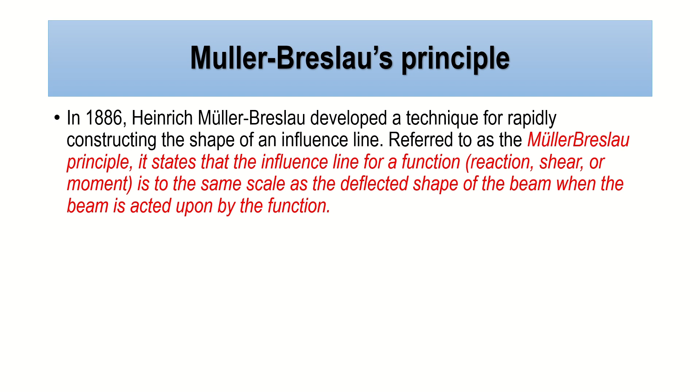So it's very simple. Let's start with the vertical reaction. How do we create the shortcut method for the vertical reaction influence line? For example, we have a given beam, and we are solving for the vertical reaction at point A. How do we get the shape of the influence line for the vertical reaction at point A?

The support is to be replaced by a roller guide. So you replace it with a roller, and then when the positive upward force is applied at AY, the beam deflects to the dashed position, which represents the general shape of the influence line. We replace it with a roller guide, then apply the vertical upward reaction AY, and the beam moves to the dashed position.

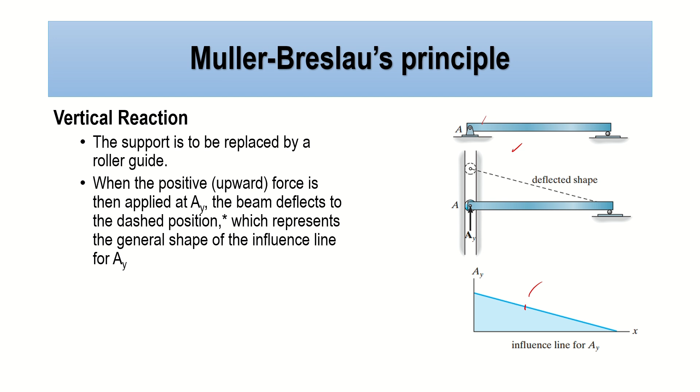So whatever the deflected shape is, that is also the shape of your influence line. The modification we used here is replacing the support condition with a roller guide, then applying an upward vertical force. So for practice, let's try to solve problem number 7.

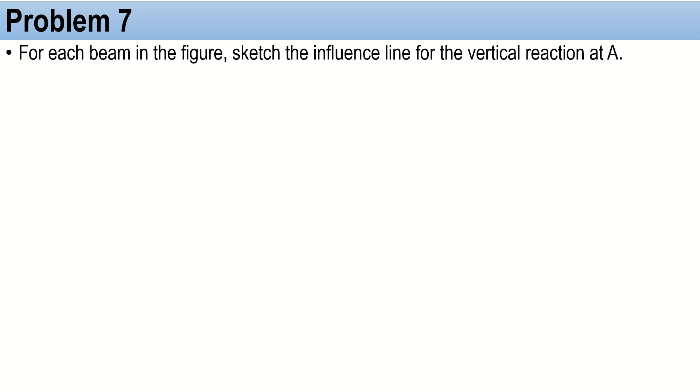For each beam in the figure, sketch the influence line for the vertical reaction at point A. We have the first figure here. Again, we replace this with a roller guide. Once replaced, we apply an upward vertical reaction. Remember, it shouldn't move here because it's on a roller, so it's supported vertically and shouldn't move. If we move this, having replaced it with a roller guide and applied an upward force, this will be the deflected shape of the beam, and that deflected shape is also the shape of your influence line.

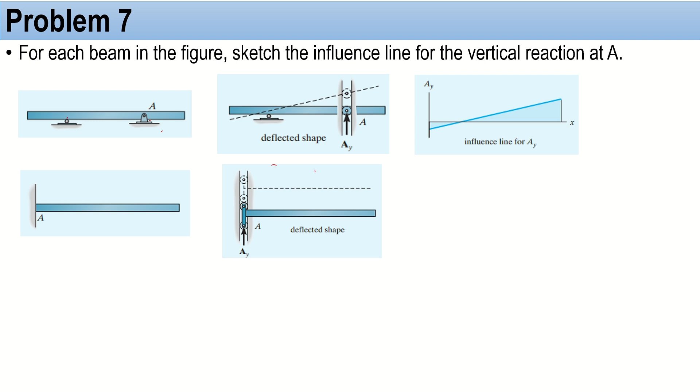For more practice, let's try another one. For example, we have a cantilever beam. Again, the support condition will be replaced by a roller guide. Once we replace it with a roller guide, it will freely move upward. Then we apply an upward vertical reaction, so this will be the shape of your influence line. As you can see, the fixed support is gone, replaced by a roller, we apply upward force, and that becomes your deflected shape, which is also the influence line.

How about this one? First thing you need to do is determine if it is statically determinate. How many unknowns do we have? We have 2 rollers, so 2 unknowns, plus another pin, so another 2. Then there's one internal hinge, which adds another 2 unknowns.

So how many total? 2 plus 2 is 4, plus another 2, that's 6. If you notice, our formula is 3n. How many rigid segments do we have? That's 2, since it's divided by the internal hinge. So 6 versus 2 times 3, which equals 6. So figure number 3 is definitely statically determinate.

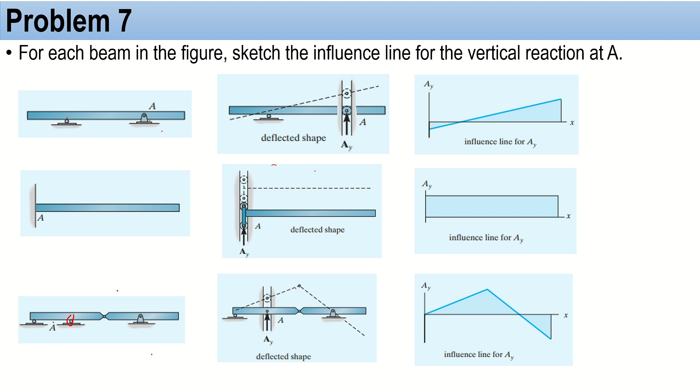Ngayon, inangat natin, so aangat yan, sasabay yan. Ito, nakatali tayo dyan kasi may support. So whatever the deflected shape of this one is, that is also the shape of your influence line. Hopefully na-understand. Kapag hindi naman na-understand, pwedeng balik-balikan, i-post tapos imaginein kung ano yung deflected shape ng beam, and then try to draw the influence line. So let's move on.

So what if we're getting the influence line or the shape of the influence line with regards to shear? Actually, ganun din. The shear location is to be replaced by a roller guide, ibig sabihin papalitan din natin siya ng roller guide. This device will resist a moment and axial force but no shear. Apply a positive shear force to the beam at C and allowing the beam to deflect to the dash position, we find the influence line shape.

So again, ito ang ating figure, yung nasa kanan nyo. We have here, we need to replace the point where we want to get the shear by a roller guide. So ni-replace na natin siya, kailangan natin mag-apply ng positive shear.

Remember, dun sa una kong principle na binigay sa inyo, ang sabi ko, kapag nag-apply tayo ng shear or kapag nag-cut tayo, yung positive shear natin, if we're considering the left side of the beam is downward, kapag we're considering the right side of the beam, that is upward. So if we apply that positive shear in our roller guide, this will be the deflected shape of your beam. Remember, nakatali tayo, may support tayo dito. Hindi yan dapat gumalaw. Again, whatever the deflected shape of the beam is, this is also the shape of your influence line. So let's try some exercise.

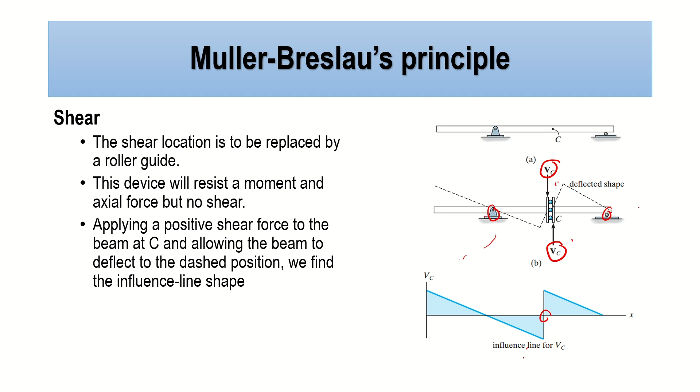Let's figure out or let's solve this problem number 8: for each beam in the figure, sketch the influence line for the shear at B. So we have here the first figure. Again, you will replace that by a roller guide.

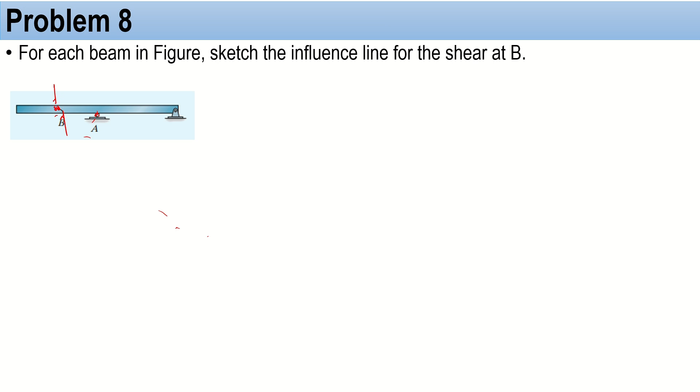Once we replace that by a roller guide, apply positive shear: downward sa left side, upward sa right side. Since nakatali ito, hindi yan mag-move. So the deflected shape of this one will be like this. Hindi siya nag-move kasi may tali ka dito, hindi yan pwede gumalaw. O hindi ka naman pwedeng maggalaw na biglaton kasi sasabay ito. So ibig sabihin, yung left side mo lang yung gagalaw na pababa. So this will be your influence line. I hope you understand.

So let's try to solve another problem. Ngayon, again, replace this by a roller guide, apply downward to the left, upward to the right. Sa left side, hindi rin po yan gagalaw. Why? Kasi naka-fix ka dito. Compare kapag nakapin ka lang. Remember, kapag fixed support, it does resist moment and reaction. So hindi yan mag-move. Ano lang yung mag-move? Yung right side. So kapag nag-move yung right side, syempre, in-applyan mo yan ng upward force. So this will be the deflected shape of your beam. This will also be the shape of your influence line.

Hopefully you do understand. So let's have another one. Again, this is a statically determinate beam. Kayo na lang mag-figure out. Again, we will replace this by a roller guide, then apply downward and upward: downward sa left side, upward sa right side.

Ngayon, eto may restriction ka, tapos meron kang dito, meron kang internal hinge. So malamang, aangat yan kasi ito doesn't provide any resistance. And then after this, bababa ito. And then, iaangat ka ngayon ng iyong right side ng segment ng beam. So this will be the deflected shape. As you can see here, that is also the shape of your influence line. Again, if you're having a hard time to imagine, you can pause this video and try it yourself. Pwede naman na kukuha lang yan sa paulit-ulit.

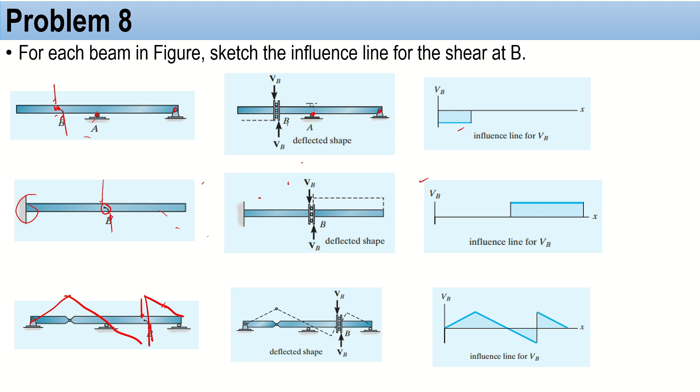That's how we figure out the shape of the influence line with regards to the shear, no? So, how about the moment? The moment location is to be replaced by a hinge or a pin. This connection can resist axial and shear forces but cannot resist a moment, no?

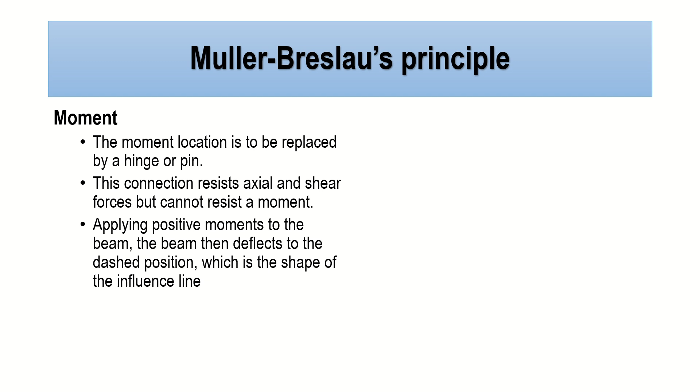Applying positive moment to the beam then deflects to the dashed position, which is also the shape of the influence line. Instead of roller guide, just like what we did in the previous concept, we will replace it with a pin or hinge. Kapag ni-replace natin siya ng hinge, apply positive yung moment. Remember, kapag left side, counterclockwise. Kapag right side, clockwise.

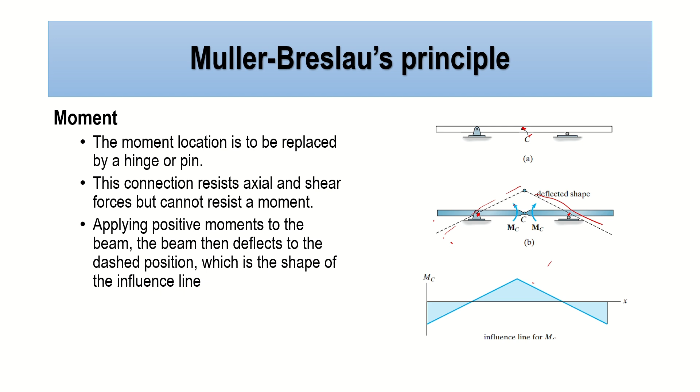Once you applied it, whatever the deflected shape is, that is also the shape of your influence line. Remember, meron kang restriction dito, hindi dapat yan gumalaw. Ito, free end naman yan, so ibig sabihin, yan yung deflected shape mo. That is also the shape of your influence line. Hopefully you do understand, no? Okay, let's try to solve some problems.

For each beam in the figure, sketch the influence line for the moment at B. So anong gagawin natin? First, this is our beam. Replace this by internal hinge and then apply, for the left side counterclockwise moment, for the right side clockwise moment. Remember, whatever you apply, kahit anong movement dito sa left side, hindi yan mag-move, kasi meron kang pin dito, tsaka meron kang roller.

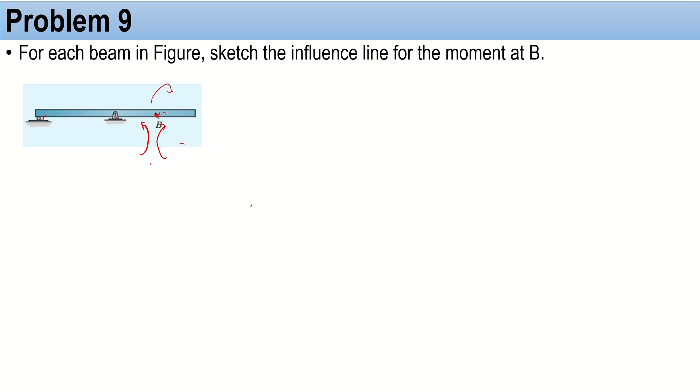Meron kang mga restriction, so ano lang yung mag-move? Yung right side. Kapag in-applyan mo yan ng moment na pag ganun, ganito yung deflected shape niyan. So ngayon, as you can see, ganyan yung nangyari. That is also the shape of your influence line. Okay, let's try another problem.

Again, meron ka dito sa gitna. Applyan mo ng left side counterclockwise, right side clockwise. Remember, this is a fixed support that can resist any moment, so therefore this will not move. Yung mag-move lang is yung right side, which magiging ganun lang, just like what happened in the first figure. So ibig sabihin, yan din yung shape ng influence line.

Okay, ngayon we have another beam right here. Again, papalitan mo to ng hinge. A-applyan mo ngayon ng positive moments. Remember, this is an internal hinge, so ibig sabihin sasabay yan sa pag-move, dahil in-applyan mo to ng counterclockwise movement and hindi sapat yung restriction niya para hindi siya gumalaw.

So ibig sabihin, ito ay aangat. And then once na umangat yan, pag umangat yan, aangat din yung right side dahil naka-hinge ka dito. Hindi siya masyado restrict, no? So itong right side aangat din na hindi gagalaw yung mga nasa support, ha? And then after that, dahil sa paggalaw na ito pababa, ito may restriction ka, aangat ulit. So this will be the deflected shape of your beam.

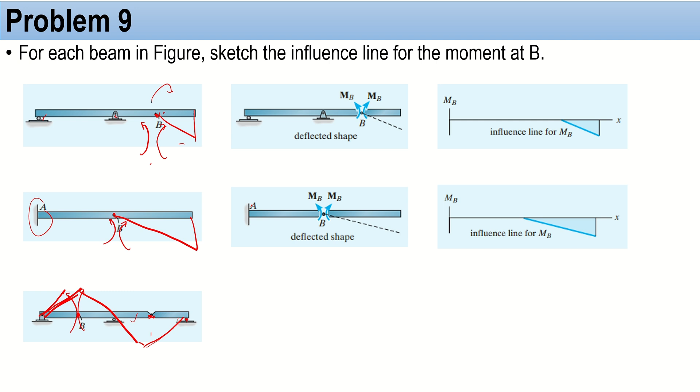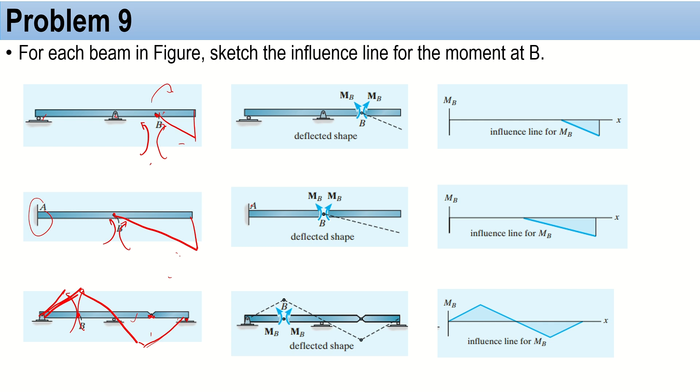That is also the shape of your influence line. Okay? Hopefully you do understand what's happening in my lecture, no? If you do have questions, you can drop that question in our comment. Okay, let's move on.

So alam na natin yung shape ng influence line. But how do we get the ordinate of the influence line using Müller-Breslau's principle? Madali lang, no? For the reaction, the magnitude of the influence line in the reaction is always positive 1. For example, di ba nagganyan yan? Ganyan yung shape ng influence line mo. Kung ganyan yung shape ng influence line mo, yung ordinate daw dito sa reaction is always 1.

Kapag 1 yan, you can do the rest using ratio and proportion or similar triangle, kasi remember, based on the principle that I discussed earlier from the previous video, yung influence line ng statically determinate beams is in straight line segments. Kung meron ka ng isang value dyan, you can also solve for the other ordinates using similar triangle or ratio and proportion.

Okay, so for this one naman, to get the value of the shear, remember, hindi ito mag-move, no? Parang paganyan yan. Dito mag-move. To get the value for the ordinate of the shear, apply 1 unit load dito, and then get the shear left, shear right. Whatever the shear left, that is also the ordinate here, and whatever the shear right, that is also the ordinate in the right side. Mag-apply ka lang ng 1 unit load.

And then do the shear, then find the different ordinate using ratio and proportion. So how about the moment? Same thing applies - apply 1 unit load to the point desired and get the moment at that point. Whatever moment you get there is also the ordinate of your influence line. Same with shear - whatever shear you get, that's the ordinate of the influence line. Whatever moment you get, that's also the ordinate. Don't forget to apply the 1 unit load.

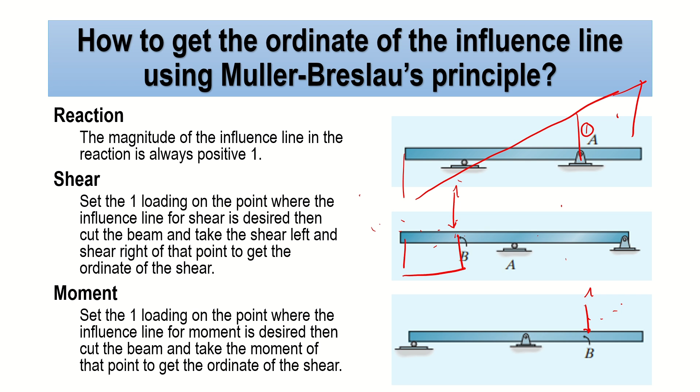So I think we have here influence line for beams. We said concentrated loading. So how do we get the magnitude? Since we already got the ordinate here, how about the magnitude or value - what is the maximum positive in kilonewtons as reaction, or maximum negative in kilonewtons as reaction?

It can be either reaction or shear, in kilonewtons. So for the maximum positive or negative, place the concentrated load where the highest positive or negative ordinate is located. Multiply the concentrated load to the ordinate to get the magnitude. Usually what's asked in questions is: what is the maximum positive reaction, what is the maximum positive shear if one concentrated load is moving. So what you do is, if maximum positive or negative is asked, just place the 1 unit or concentrated load where the maximum positive or negative ordinate is located.

For example, you have a moving 90 kN load. If you want to get the value for the maximum positive reaction that the beam can generate, just place the 90 there. Once placed, multiply the 90 by the ordinate of the influence line. In this figure, the ordinate is 1. Whatever the value is, that's also the magnitude - or how large the reaction value will be when the 90 kN moves along this beam.

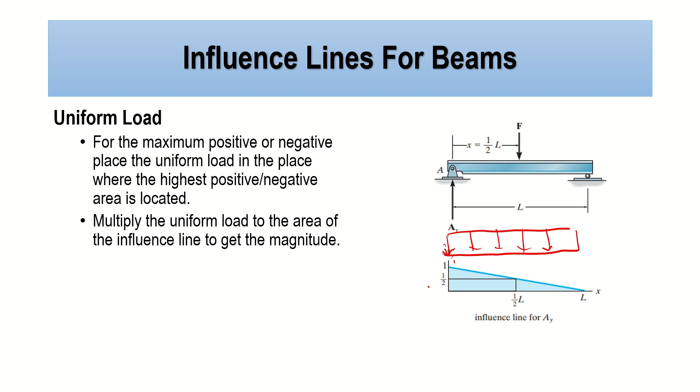Say you have 10 kN per meter here. To get the magnitude, multiply the area where you placed the moving load by the ordinate of the uniform load, and then you will get the value for the magnitude, okay?

So say you're looking for that - what area is that? It's just a triangle, so 1/2, height is 1, base is L. Then multiply that by 10, and that will be your magnitude, whatever is being asked.

Let me repeat to make it clearer. If we have a uniform load that is moving, and you're looking for positive, just place the uniform load on the positive part of the influence line. If you're looking for negative, place the uniform load on the negative part of the influence line. Once placed, to get the magnitude, multiply the area of the influence line where you placed the uniform load by the uniform load value, and you will get the magnitude. If you're still confused, we do have an example. That's how we get the magnitude of the influence line.

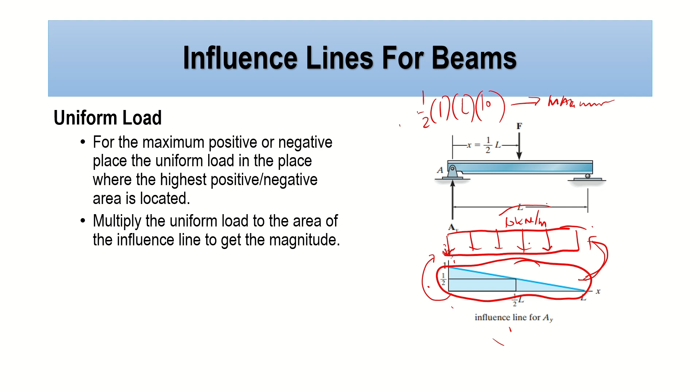Okay, so let's try to solve problem number 10. Determine the value for the maximum positive shear that can be developed at point C in the beam shown in the figure, subjected to a concentrated moving load of 4 kN and a uniform moving load of 2 kN per meter. So, first thing we need to do is redraw the figure.

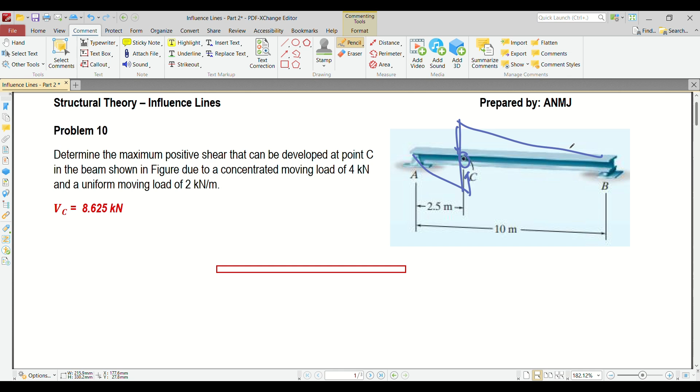Let me redraw the figure. So, that's our figure. And then apply the deflected shape of the beam. Again, when shear is being asked, you will apply a roller guide. Then apply downward shear for the left beam, upward shear for the right beam. So what happens there is it goes down, then rises, then goes down again. So that will be your influence line.

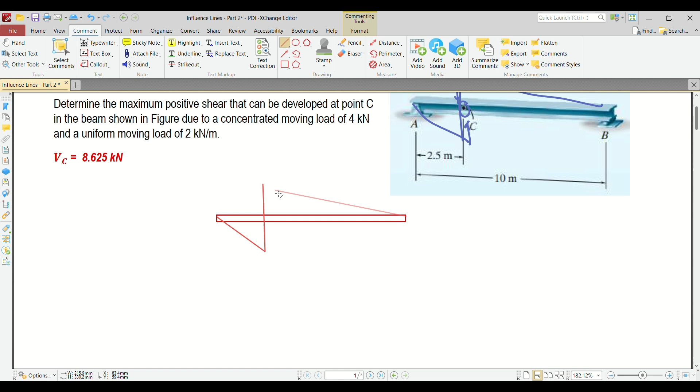Okay, so I already drew the influence line. Now we need to find its magnitude, or the ordinate. How do we find the ordinate? Remember, as I said earlier, you need to place a 1 unit load. So place the 1 unit load here, then get the shear left and shear right to get the value for the ordinate. If you have a 1 unit load there, you need to get the reaction.

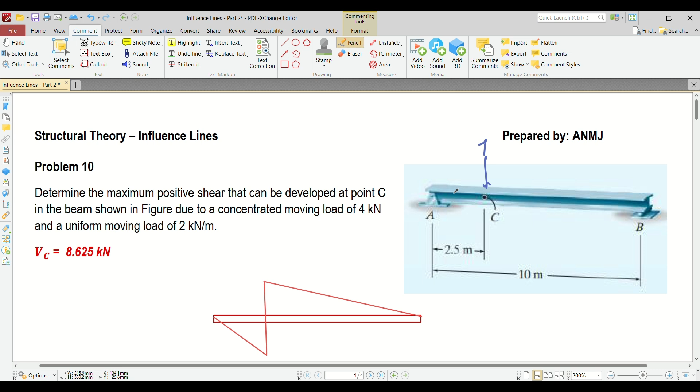Then you need to consider whether it's the left side or the right side. If we have a 1 unit load there, it's easier to solve using the left side. Let's figure out the reaction for RA. How do we get RA? It's easy. Summation of moments at B equals 0, clockwise positive. So we have RA multiplied by 10 minus 1 multiplied by 7.5 equals 0. So our RA should be equivalent to 0.75.

Okay, so now we have RA equal to 0.75. Again, we need to cut that and get the value for shear left and shear right. So here it is. Okay, we already cut it. So we do have a reaction here equivalent to 0.75, and the distance is 2.5 meters. Remember, our shear is downward. Then we'll get VCL and VCR.

Okay, how about VCL? Oh, you still have the 1 unit load there. Remember, when we get VCL, the 1 unit load is still included. When it's VCR, it's no longer included. Opposite direction is positive, same direction is negative. So we have 0.75, opposite direction, minus 1 — this is still included because we're still talking about VCL. So VCL is equivalent to negative 0.25.

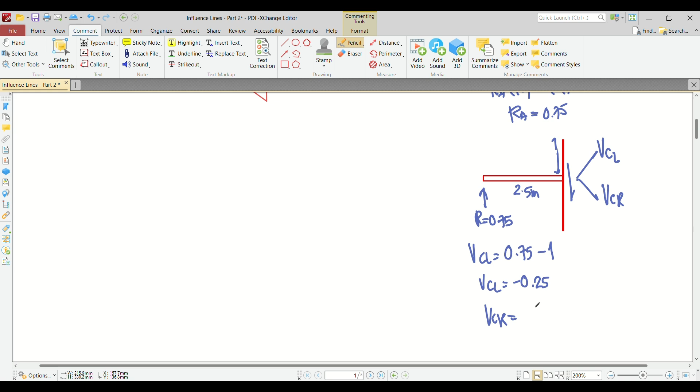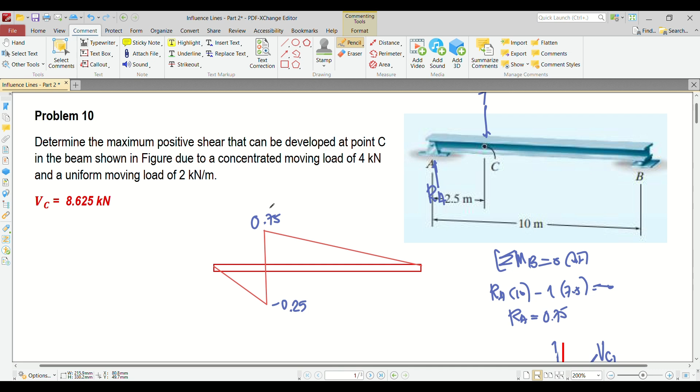Okay, how about VCR? Remember, for VCR, the 1 unit load is no longer included since it has already passed. Once it has passed, you're just left with 0.75. So that means the value of the ordinate on the left side is negative 0.25, and this one is positive 0.75. So I already got the value for the ordinate of the influence line.

So now, what's next for us to do? How do we get the maximum positive shear? What we'll do is first place the horizontal distances. So this is 2.5, this is 7.5 meters. We have a moving concentrated load of 4 kN. When positive shear is being asked, based on our concept, we need to place the moving load at the maximum positive ordinate. So that means we'll place the 4 kN here — that's the maximum positive.

Right? Now, if we have a moving uniform load of 2 kN per meter and positive shear is being asked, you just need to place the moving load wherever the positive influence line is located. So where is the positive influence line located? From here up to here. So that's where you should place your moving uniform load, with a value of 2 kN per meter.

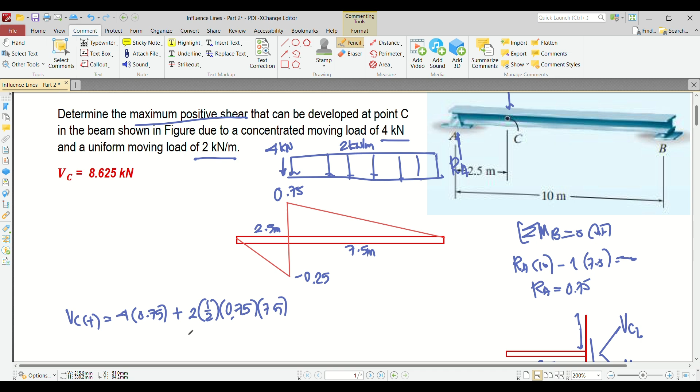Okay, so after that, to get the value for VC positive, for concentrated loading you just multiply it by the ordinate. So that would be 4 times our ordinate of 0.75, plus, for uniform load, you multiply it by the area of the influence line. That would be 2 times 1/2 — our height is 0.75, our length is 7.5. So what will be the value for VC positive? Let's see — oh, we already have the answer here: 4.

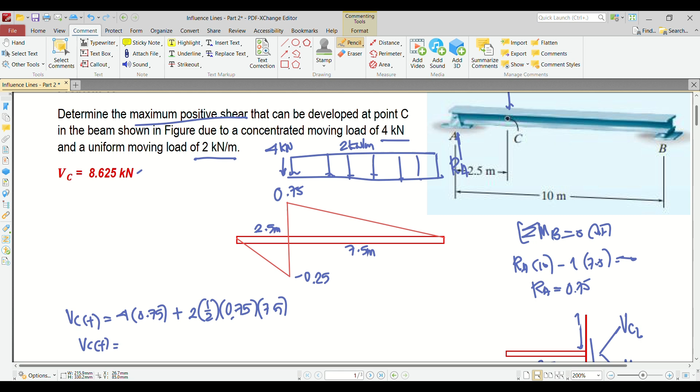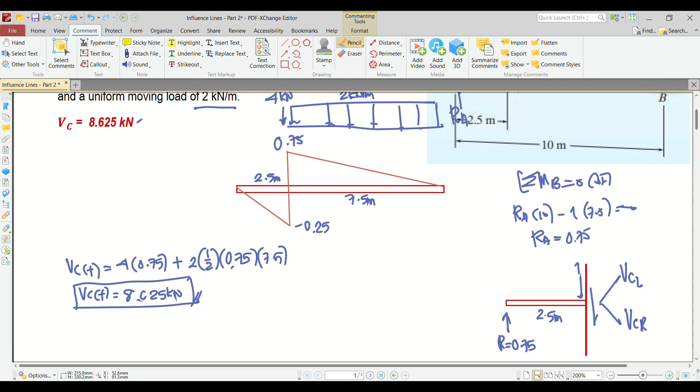So, ang lumalabas sa akin is 8.625 kilo Newton. Di ba mas madali? So ano ibig sabihin nito? Kapag may nagmo-move na 4 kN, tsaka 2 kN per meter dito sa beam na to, i-place mo siya dito, yung moving load, tas yung uniform load dito, to get the value for the maximum positive na 8.625 na pwedeng mangyari dito sa iyong beam. Ito yung maximum positive shear na pwedeng mangyari dito sa iyong beam kapag may nagmo-move na 4 kN tsaka 2 kN per meter.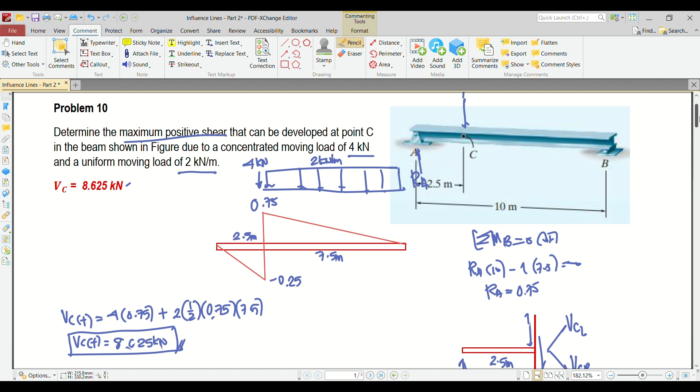So that's how we solve problem number 10. Okay, so let's try to solve another problem.

Okay, so let's try to solve problem number 11. So sabi dito, for the beam shown, determine the following due to a concentrated live load of 90 kN and a uniformly distributed live load of 40 kN/m, and a uniformly distributed dead load of 20 kN/m. So pinapahanap positive shear, negative shear, positive moment, and negative moment.

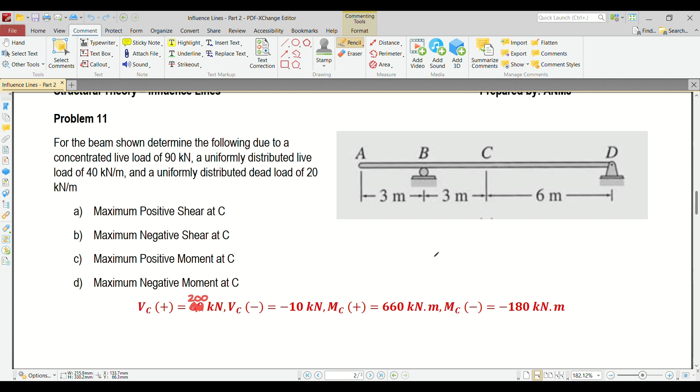Tinadtad ko na, no, para mas maalam natin yung concept. So class, take note that in this problem, in-state niya kung ano yung dead load tsaka live load. That is very important, no. Kasi when we say live load, that is moving. So ibig sabihin, itong mga 90 na to, tsaka 40 na to, ito yung moving load natin. But when we say that it is a uniformly dead load, that is not moving.

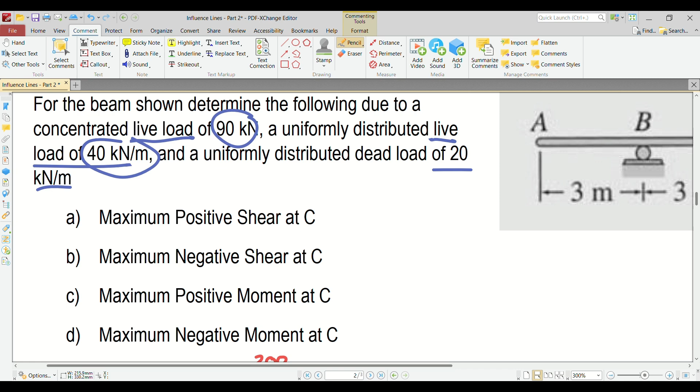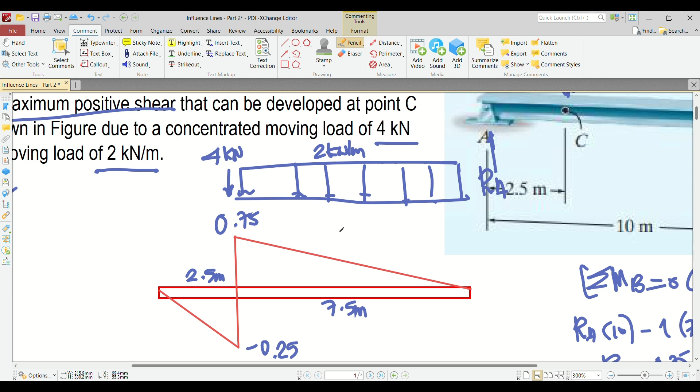So ibig sabihin, we need to apply that to the entire structure or to the entire span of the beam. Kanina, ina-apply lang natin yung mga live load, just like what we did sa first problem, on a certain portion, kung ano lang hinahanap mo. It can be either positive or negative. Kapag moving load, or in our case live load, kapag dead load, kailangan mo pa siyang i-apply sa entire structure. Okay, so let's try to solve letter A.

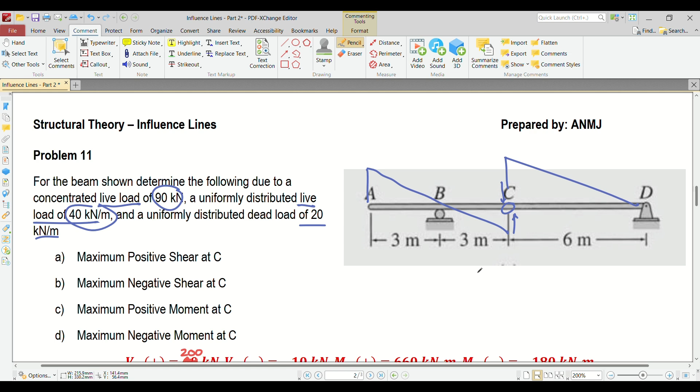So lagyan natin dito, letter A. For letter A, ang pinapahanap positive shear. Pero bago yun, kailangan muna natin i-construct yung shape ng ating influence line. Again, place ka ng roller guide. Apply downward shear for the left, upward shear for the right. May restriction, so ibig sabihin, aangat ka dito sa left side, bababa ka dito banda kasi binaba ka na ito. And then, for the right side, angat ulit, is pa ganyan. That will be the shape of your influence line. Okay, so let's draw that.

Again, if you're having a hard time imagining the shape of the influence line, pwede naman practice-in, no? Panoorin lang ulit yung mga video pa ulit-ulit. Kaya nyo rin yan ma-master.

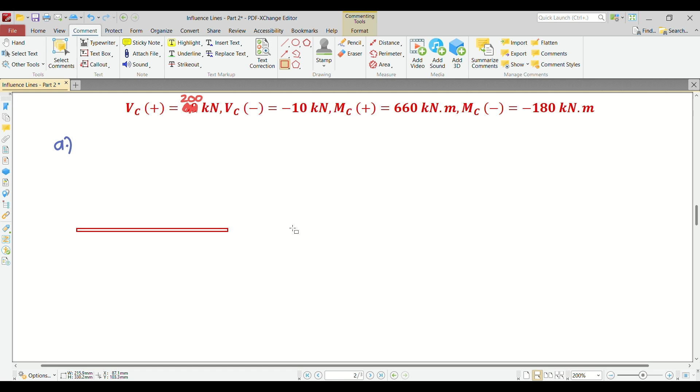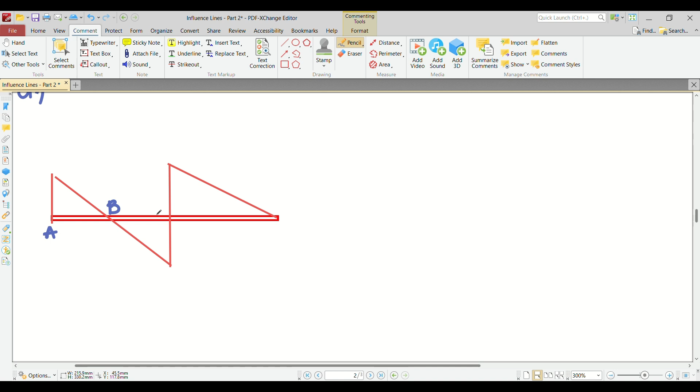Okay, I already got this. I already got the figure. So lagyan lang natin ng letter. This is letter A, B, C, and D. Lagyan natin distance: 3 meters, 3 meters, and then this one is 6 meters. Okay, so after that, since we already got the value for or the shape of the influence line based on Müller-Breslau's principle...

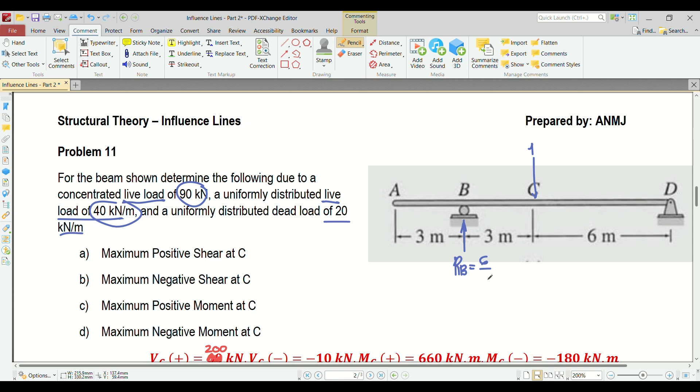...ang kailangan natin is makuha kung ano ba yung mga ordinate niyan. Para makuha yung mga ordinate niyan, kailangan mag-place ng 1 unit load dito sa shear and then get the shear left, shear right. So ngayon, for me, ang i-consider ko na lang is left side. Ngayon, kapag kinuha ko yung left side, kailangan ko ng reaction sa B. And you already know how to get that, no? Madali na lang naman yan. Basically, ang reaction lang yan is 6/9, or kapag sinimplify mo, that is equivalent to 2/3.

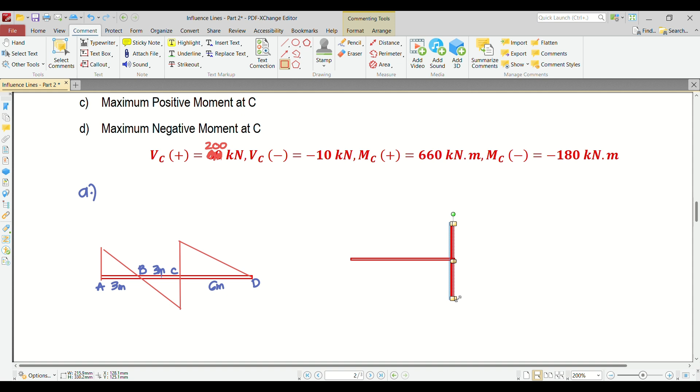No? So i-cut na natin. Consider natin yung left side. So meron ka ditong 2/3, that is based on the reaction. 3 meters and then 3 meters. Again, yung shear natin is downward, no? V, tapos it we considered as VL, tsaka VR. Don't forget your 1 unit load, nandito yan sa point C. Okay, V, A, C.

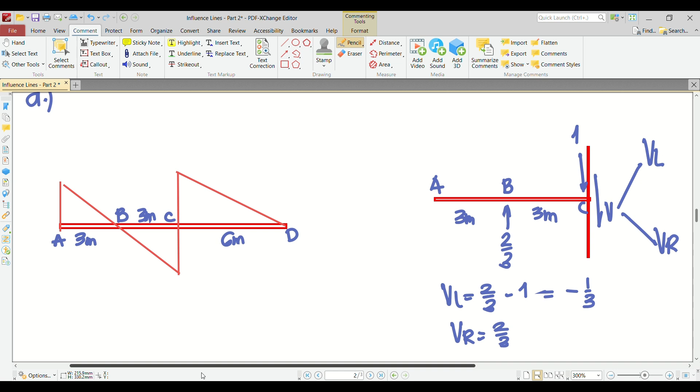So kapag VL, opposite direction positive, same direction negative, so opposite direction si 2/3, we need to include 1 unit load kasi hindi pa nakakalagpas. Minus 1, that would be equivalent to negative 1/3. Kapag VR naman, hindi na included si 1, so 2/3 na lang. Okay, that will be your ordinate. So this will be, for the left side, 1/3.

For the right side, that would be 2/3. Now, how do we get this ordinate? You can use ratio and proportion, but based on inspection, since this is 3 meters, it's 1/3. Likely, if this is also 3 meters, it's also 1/3. Okay, so let's place the moving loads.

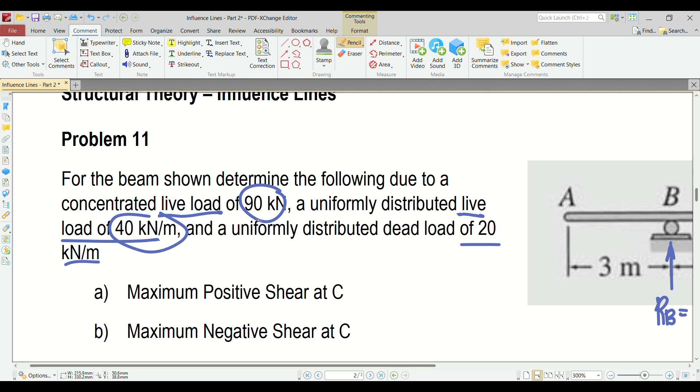Remember, we have a 90 kN concentrated moving load. Again, we need to place this at the maximum, in our case, the positive ordinate. So which is bigger, 1/3 or 2/3? Likely 2/3. So the 90 kN goes here.

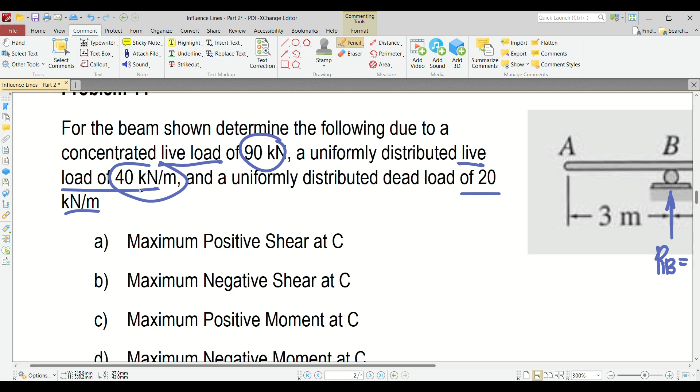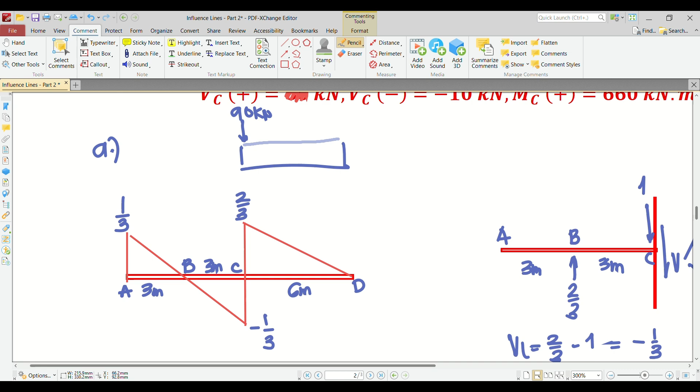So what else? We also have a moving load of 40 kN per meter. Again, we need to place that where the positive ordinates are located, which in our case is two places. So we need to place the 40 there. This is the first 40, and the other one will be right here.

And then, like I said earlier, for dead load, it needs to be applied throughout the entire span. So we need to apply that across the whole span. This is 20 kilonewton per meter. Okay, so let's try to compute for VC.

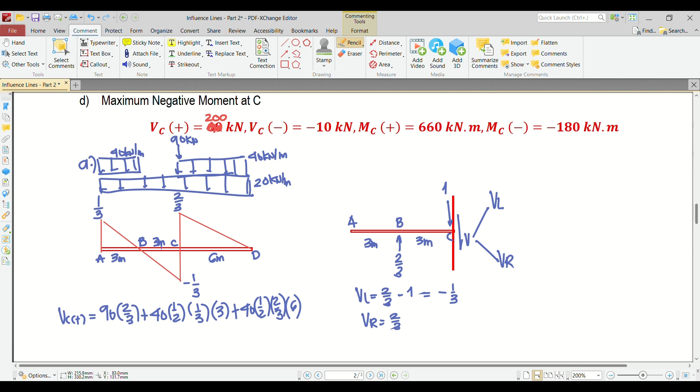VC positive. It's easy, right? 90 multiplied by the ordinate, 2/3. Plus the uniform load, that's 40. This area first: that's 1/2, height is 1/3, length is 3. Plus this one: height is 2/3, length is 6. Okay, after that, for the dead load, plus this portion.

This portion, 20, 1/2, 1/3 times 3. Then this portion, minus since it's negative now, 20 times 3, and then another plus since it's positive, so 20 times 1/2 times 2/3 times 6.

Okay, so these two cancel out since they have the same value. So if you add that up, the value for VC positive is equivalent to 200 kilonewton. Okay, that would be your answer for letter A.

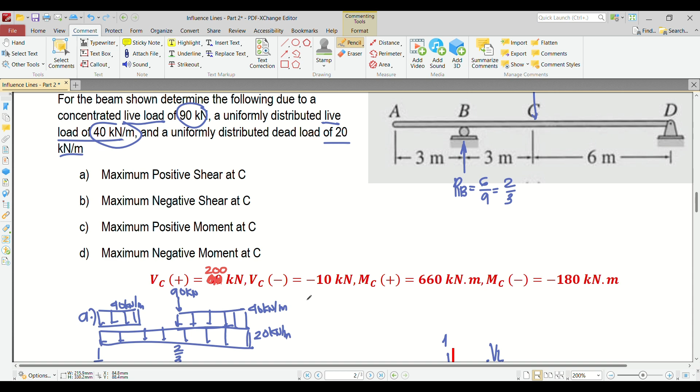Okay, so let's try to answer letter B. For letter B, it's the same, this is still your figure, so let's just copy that. Because that's still the influence line for shear at point C. That won't change.

Okay, so this is 1/3. This is negative 1/3, 2/3. Okay, 3 meters, 3 meters, 6 meters. So now we're looking for the negative value.

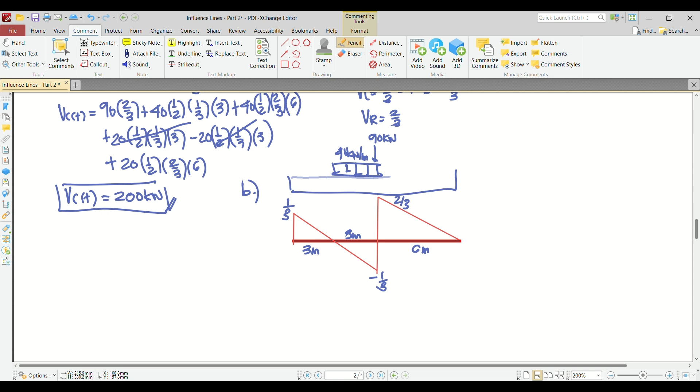Let me just move this. This is the 40 kilonewton per meter, since that's the only negative part. Then apply the 20 across the entire length of the beam. Okay, so this one is 20. Okay, and then after that, we can solve.

VC, let's do the right side here. Negative, so that would be negative 90 times 1/3. This is the ordinate here. Then minus 40, 1/2, height is still 1/3, times length 3.

Okay, and then after that, minus, no, plus first. Let's do the left side first. So plus 20, 1/2, height is 1/3, length is 3. And then minus 20, 1/2, 1/3, and 3. And then plus 20, 1/2, 2/3, and 6. Okay, so these two cancel out.

So let's calculate: negative 90 times 1/3, minus 40 times 1/2 times 1/3 times 3, plus 20 times 1/2 times 2/3 times 6. What I get is negative 10. So VC negative is equal to negative 10 kilonewton.

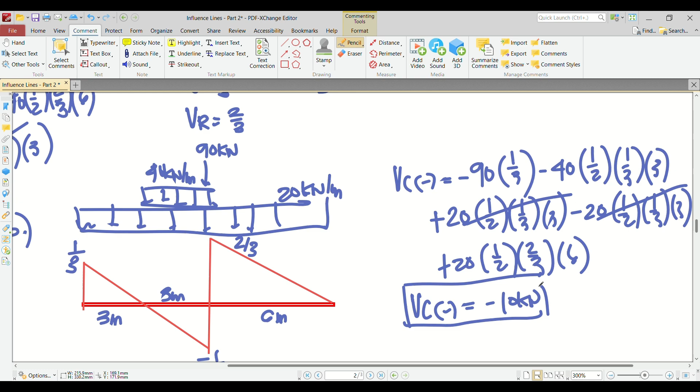Okay, let's see if that is correct. Yes, that's correct, negative 10 kilonewton. Okay, so what about positive? For positive, it's the same.

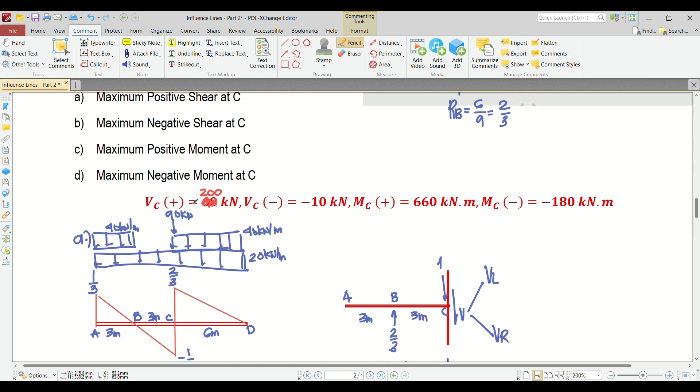Okay, so ngayon i-place mo ulit yung 90 kilonewton to the maximum positive ordinate. So in our case, this one, nandyan si 90. After that, place mo yung 40, kung saan lang positive. So this is 40.

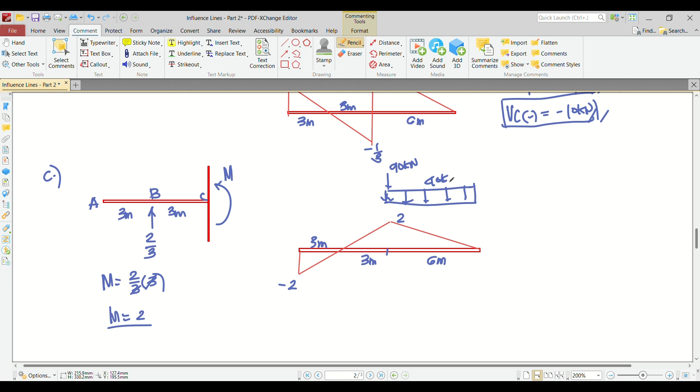And then i-place mo naman yung dead load to the entire structure or the entire span. Okay, so after that pwede mo na ma-solve M positive, C.

So paano yan? So we have 90, ganun pa din, multiply mo sa ordinate plus 40, 1/2. Ang ating height is 2, ang ating base is 3 plus 6, kasi pwede na i-consider to isang buong base, no? So that would be 9. Kasi ganun pa din kumuha ng area ng triangle, no? 1/2 base times height, this is your base, this is your height, no?

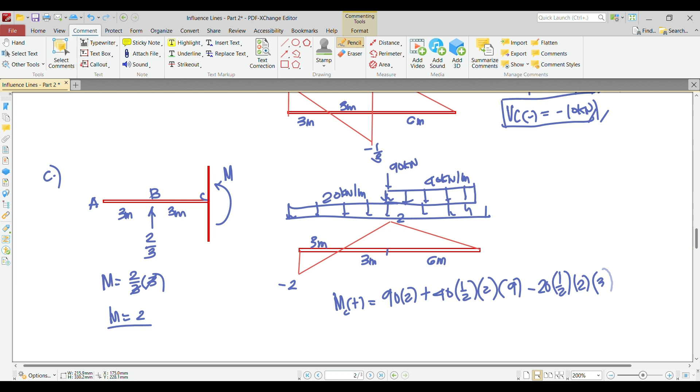And then minus 20 times 1/2. Ito yung kino-consider ko, ha? Times 2 times 3. And then plus 20 times 1/2 times 2 times 9. Okay, so let's figure out what's the value for MC plus.

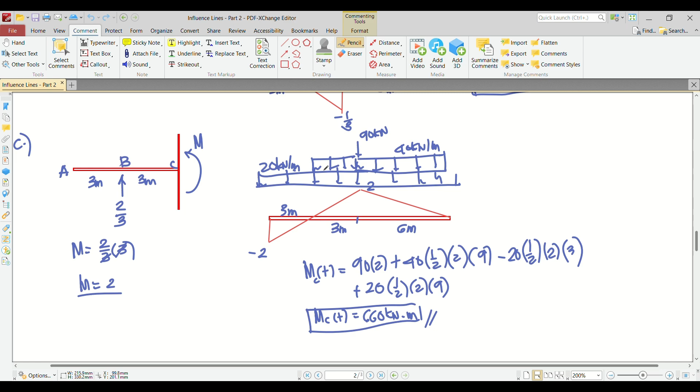Kasi dapat entire muna, entire positive, no? Okay, so for letter D, maximum negative, same lang din yung ating influence line. So kopyahin ko na lang.

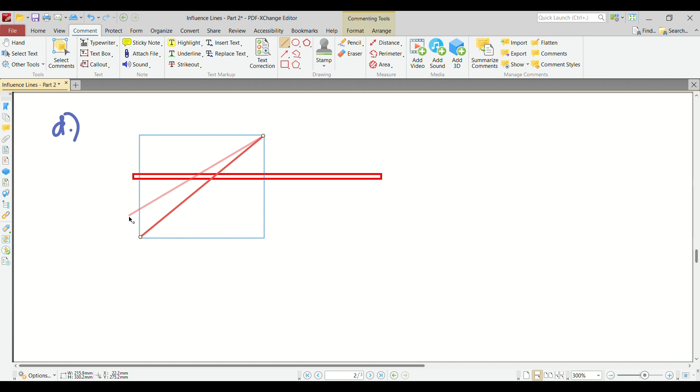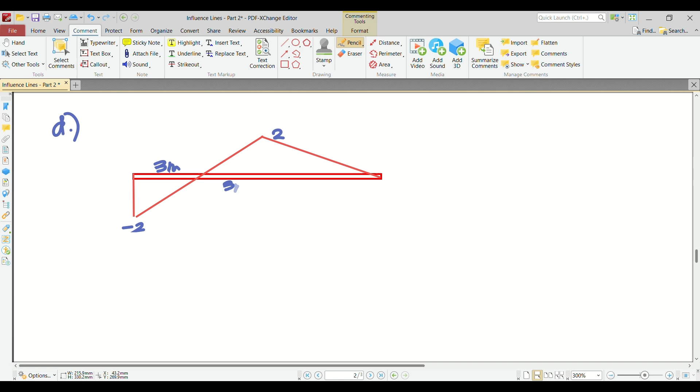Okay, so ito ay 2. Ito ay negative 2, 3 meters, 3 meters simula dito hanggang dito, and then another 6 meters. Okay, so again ang pinapahanap sa atin is maximum negative moment.

So meron tayong 90 moving load. So nandito yung 90, yan lang naman yung negative eh, 90 kilonewton. Ngayon meron tayong 40 na moving load, so kailangan mo lang yan i-place from here to here. So ito ay 40 kilonewton per meter.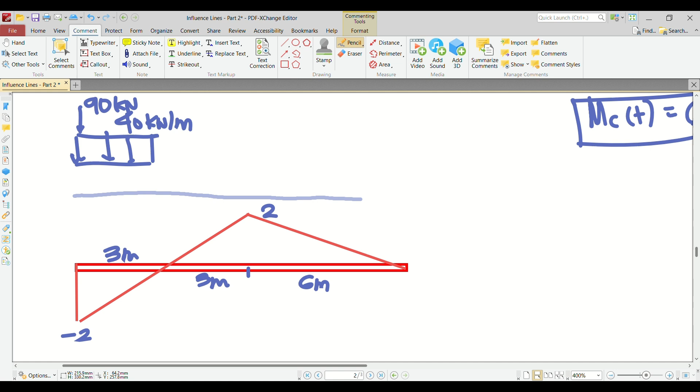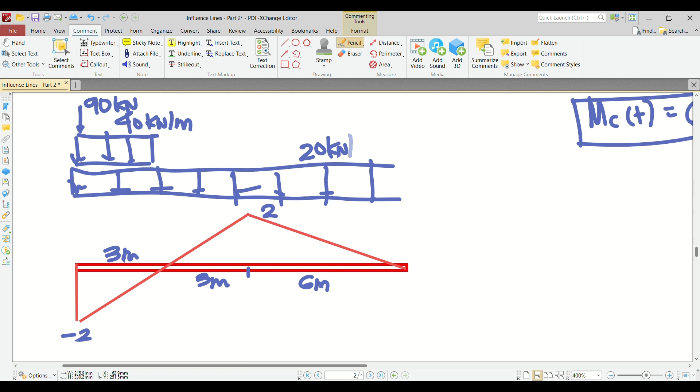And then we do have a dead load of 20, which we need to apply to the entire span of the structure because that is a dead load. Okay, so 20 kilonewton per meter. Okay, let's try to solve.

So MC negative is equals to negative 90 multiplied by 2. Okay, and then minus 40, area of that is 1/2, height is 2, length is 3.

And then minus 20, ito muna yung unahin ko, no? Times 1/2 times 2 times 3. And then plus 20, 1/2 times 2 times 9. So ito na yun. Okay, so ano kaya yung MC negative?

Ang nakukuha ko ay negative 180 kilonewton meter. Okay, so let's see if that's correct. So, correct, yan, tama naman tayo.

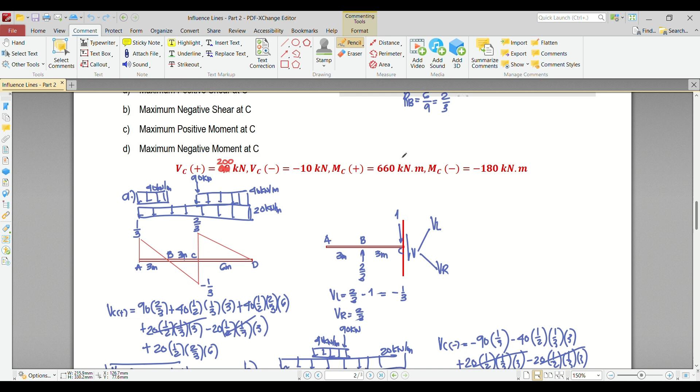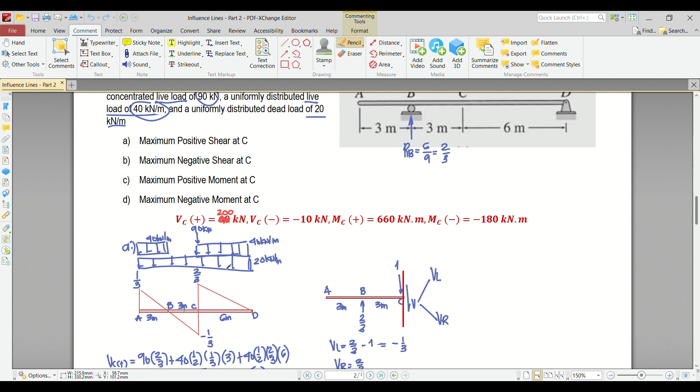Okay, so para saan ba yan mga nakukuha nating maximum? So ibig sabihin yan, for example, you're designing a bridge. So you need to design the bridge where the 90 kilonewton is placed at point C, tapos yung uniform, ganito yung uniform load scenario, no? So in order to achieve the maximum positive na 200 kilonewton, so yan ang i-design mo, yung 200 kilonewton.

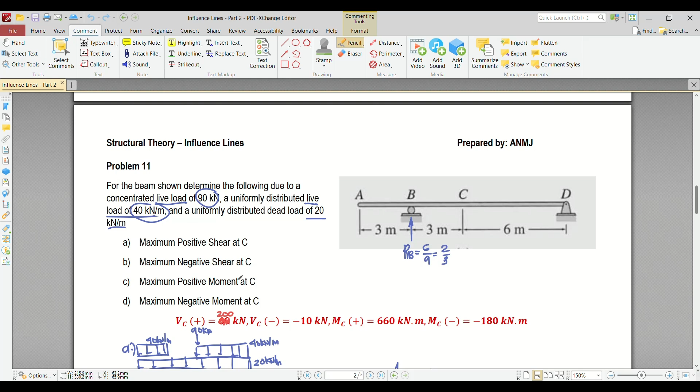Kasi yan yung worst case scenario. Itong mga nakukuha nating sagot is the worst case scenario considering the moving load of 40 kilonewton per meter and a 90 kilonewton concentrated live load. Okay, so that's how we answer problem number 11. Okay, so let's try to answer problem number 13.

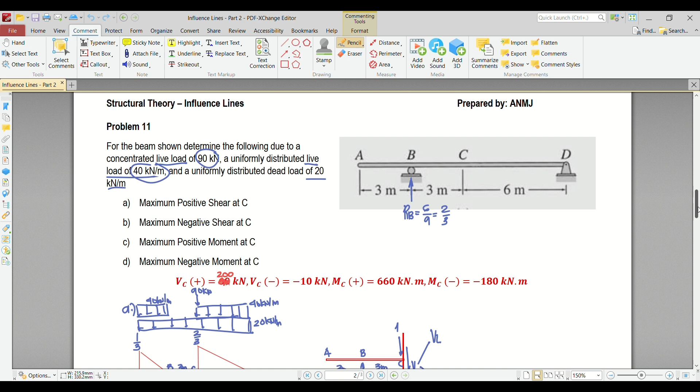Okay, so this is problem number 13. So, the problem says: determine the maximum positive moment that can be developed at point D in the beam shown in the figure due to a concentrated moving load of 16 kilonewton and a uniform moving load of 3 kilonewton per meter and a beam weight of 2 kilonewton per meter.

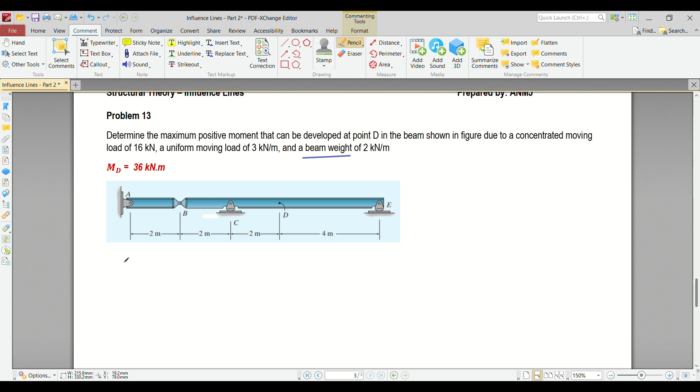Remember, the beam weight is considered as dead load, while the 3 and 16 are considered as live load. At first glance, it looks intimidating because it seems like an indeterminate beam, but don't worry, let's figure out if it's really indeterminate.

So we have two reactions here - a rocker, that's 2, plus another 2 because there's an internal hinge, so 2, 4, and then 6 unknowns. Now how many rigid members do we have? We have 2 rigid members, so 3 times 2, that's also 6. So this beam is statically determinate.

Definitely, we can solve the value for the influence line of that. Since we're looking for positive moment at point D, basically you place a roller guide, an internal hinge, and then apply the moment. When you apply the moment, there's a restriction, so it will have a certain shape.

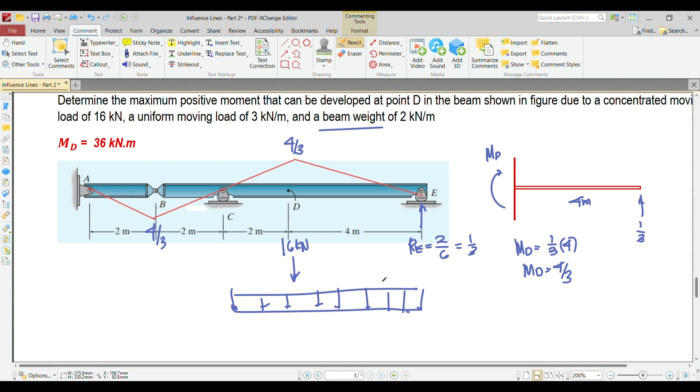After that, let's place the moving loads. You have 16 - since we're looking for positive moment, place it at the maximum positive point, which is 4 over 3. So you have 16 kilonewton there. Then you have the moving load of 3 kilonewton per meter - place it there too, since that's the only location of the positive influence line, so that's 3 kilonewton per meter. Then the 2 kilonewton per meter dead load needs to be placed across the entire span of the beam.

Okay, so now we can solve for MD+. MD plus: let's start with the 16 - so 16 times the ordinate 4 over 3. Plus the 3 kilonewton per meter, which we can treat as a triangle: 1/2 times height 4 over 3 times base, which is 2 plus 4, so that's 6.

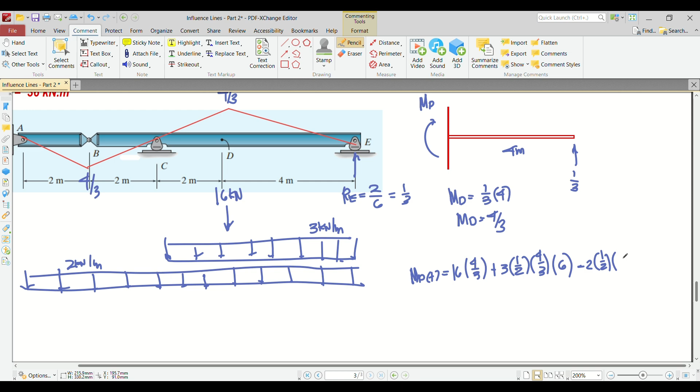And then after that, the dead load or self-weight: minus 2 times 1/2 times... 2 plus 2, that's 4 - but 4 over 3 first, length is 4. And then plus 2 times 1/2 times 4 over 3 times 6. So how much is that?

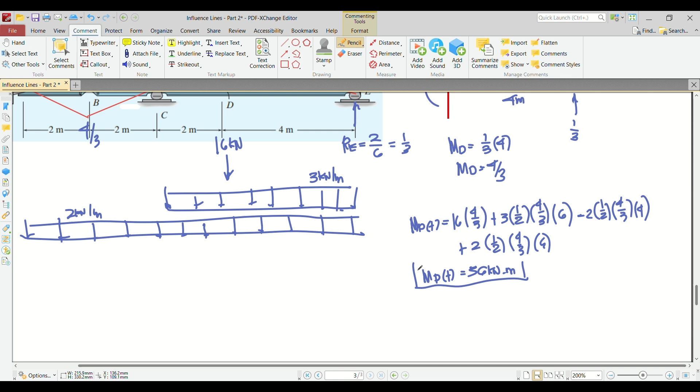MD plus... so the answer I got is 36 kilonewton meter. So when you have a moving load like this, you need to design your structure for a moment of 36 kilonewton meter. Let's check if we're correct - yes, that's correct. So that's how we solve problem number 3.

Okay, we still have more problems, especially on influence lines of trusses and multiple concentrated loads with wheels, how to solve those - stay tuned for that. That will be part 3 of this discussion on influence lines. See you in the next video.